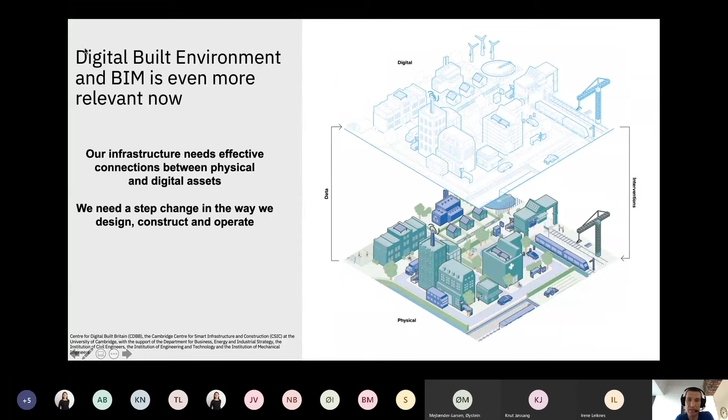And like I said, I believe the digital built environment and BIM is even more relevant now. The infrastructure needs effective connections between physical and digital assets, and as I mentioned, we need a step change in how we design, construct, and operate. And also, to summarize, the journey to the new normal.

This lets us rethink where we are in terms of being digitally ready for a crisis. Are we? Where are you? Are you crisis neutral, equipped, responsible, crisis resilient? I can definitely see lots of businesses trying to use digital transformation and adopt BIM, fast-forwarding BIM now to become more crisis resilient going forward.

And I see stakeholders like HS2 starting to think about how can we integrate our back-end systems, around its technology and IT, with the front end, the whole digital transformation of the built environment.

And when I talk about the built environment, I talk about all forms of building, housing, residential, infrastructure. And I think it's important to mention it, because sometimes, in certain parts of the industry, I see that infrastructure is being treated as a kind of specialty to the rest of construction.

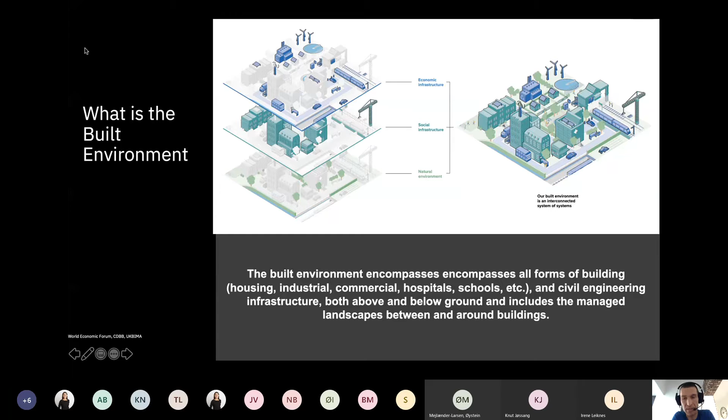Quite often I see, obviously, we can see it in buildingSMART especially, that we create unnecessary IFC extensions around IFC rebar, IFC rail, where we should really look at how the BIM and built environment extends beyond that, because IFC, as I'm sure you know, is not sometimes equipped for the data granularity and the way we need to express data.

So we don't necessarily, in my opinion, need to be transferring data templates. Data templates could reside easily in a cloud. We can start looking at exploring the data lake vision with the use of data templates as almost some kind of filter, and enable the interconnected kind of dictionary type of vision, and perhaps looking at maybe using blockchain as a validation if certain business is compliant to EN ISO 23386.

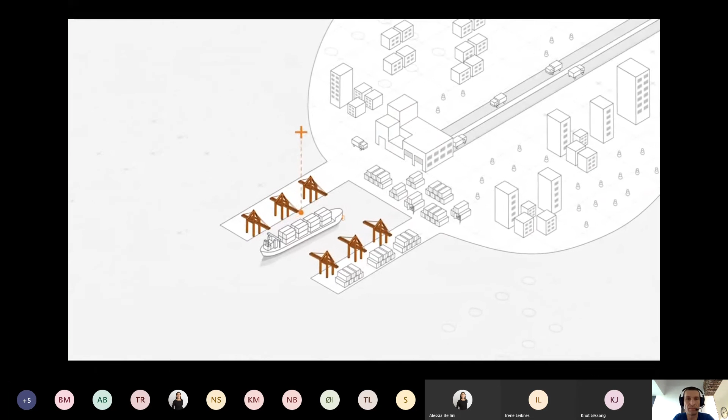Could you hear the sound, or was there sound? Yes. But I think now it's gone. Oh, really?

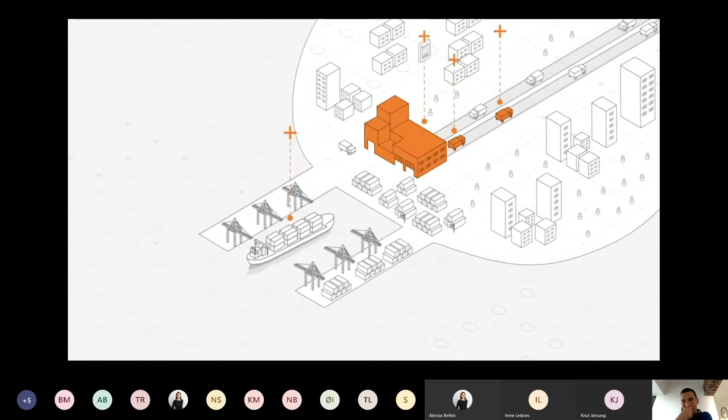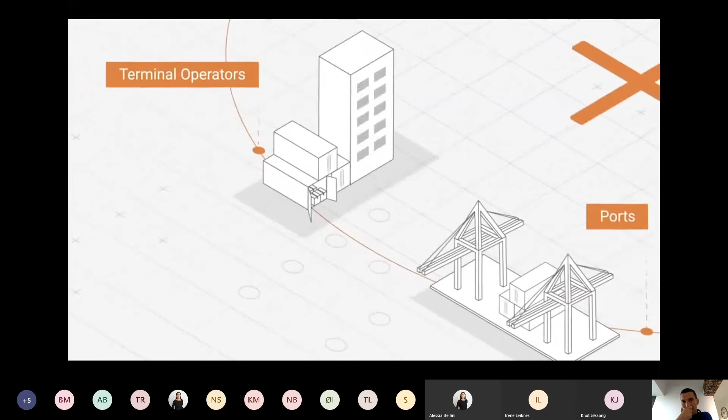To illustrate some of the ways TradeLens enables collaboration and reduces friction, let's follow a shipment of laptop computers from inland China to their final destination, along the west coast of the United States.

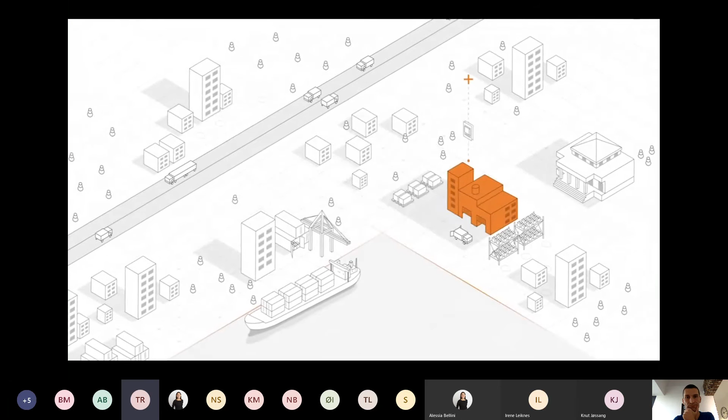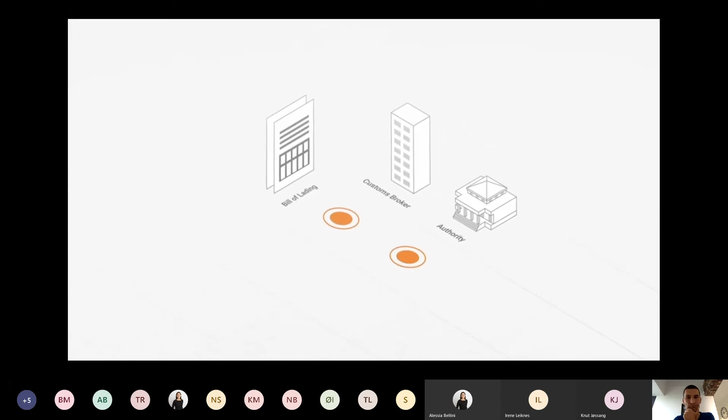Using the document sharing capabilities of TradeLens, the shipper can submit shipping instructions to the carrier, who accesses the information to draft a bill of lading for the shipper's review. Once a final bill of lading is verified by the shipper and carrier, TradeLens makes it accessible to the customs broker, the authorities in the port of entry, and the cargo owner at the destination.

All along the supply chain, access to shipping data and information is managed by TradeLens' sophisticated permissioning model. It controls who can add, view, and update information at each stage of a shipment, and provides a blockchain encrypted audit trail of all critical actions.

The benefits of TradeLens really deliver when the planned turns into the unplanned. Due to a sudden shift in inventory demand, the shipper requests the cargo be diverted to its distribution center in eastern US near Savannah, Georgia. Following the request, the shipment is rebooked on another vessel, requiring a change to the manifest and a reissued bill of lading.

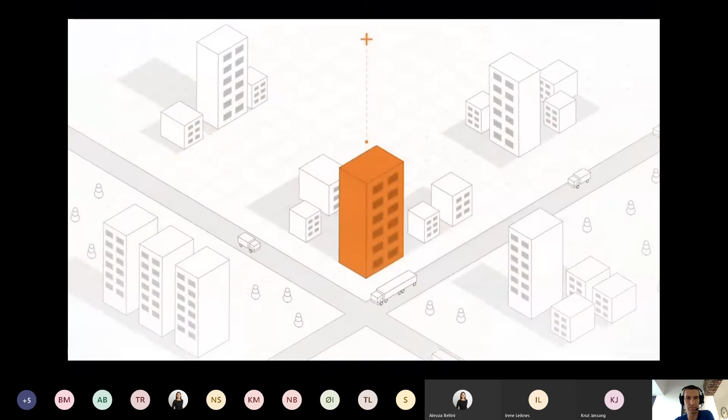Using TradeLens, the carrier can create and publish the amended bill of lading to the platform for all permissioned parties to see. At the customs broker, the new information is updated into the shipment's import declaration for timely submission to US Customs.

With TradeLens, any permissioned party can find the shipment through a range of search parameters, such as equipment number, bill of lading number, booking number, and more. Viewing the transport plan, they can see the key milestones on the shipment's timeline. TradeLens supports more than 120 planned, estimated, and actual events, all tracked instantaneously, giving detailed insights up and down the supply chain. In the case of this shipment, supply chain partners downstream are notified of the vessel change and are able to coordinate and manage the impact of the destination and timeline changes.

Global trade is an incredibly complex system, but with TradeLens and blockchain technology...

So yeah, it was just an example. I thought it was good to show, because I think TradeLens is a good example, and I'm not going to go through the others because I'm conscious of time, of how data is being used, how standardized process is being used, and how the entire supply chain benefits from it. And it's an industry platform.